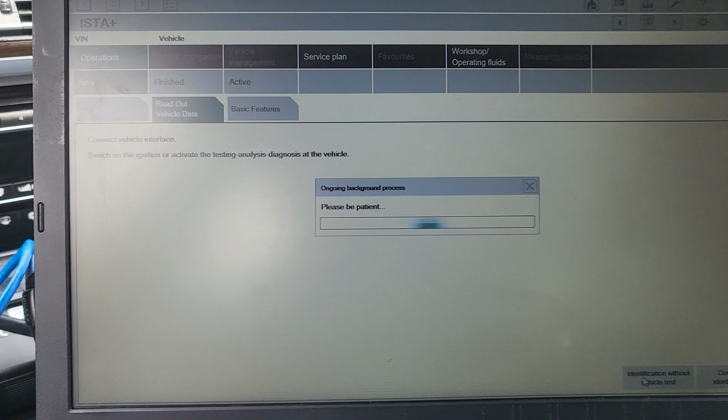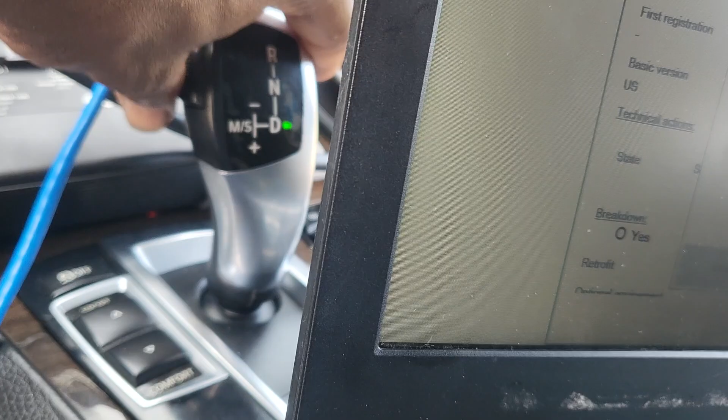So I'm gonna go to read out vehicle data. Hopefully I have communication. Start, diagnose the car. I want to know if I can get some information here. I have voltage. The voltage is 11 something. Why? The car in the back is not working well. So now I want to see if I can get the VIN number. Yes, that's good news. We have the VIN number, transmission D, and it never goes out of that place. Ignition is on.

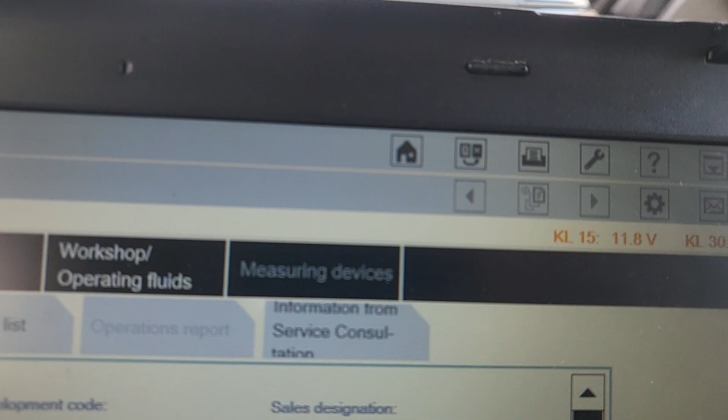Okay, it says battery voltage is low. You want to give some gas there? 11 is so low. Are you sure the bag is connected? Yeah. The voltage is very low. The voltage is 11.8. If the car is running, it's supposed to get 13 volts.

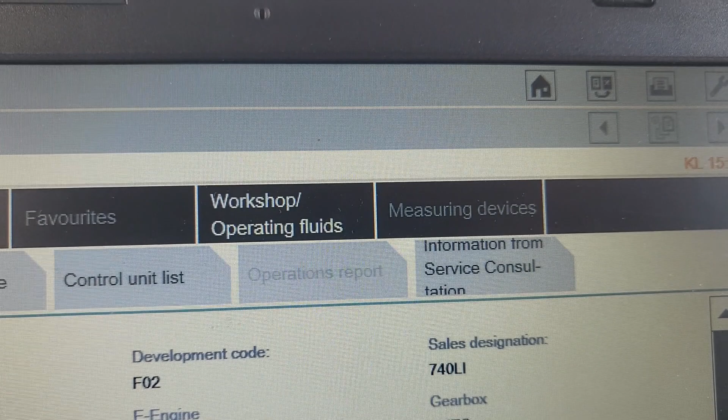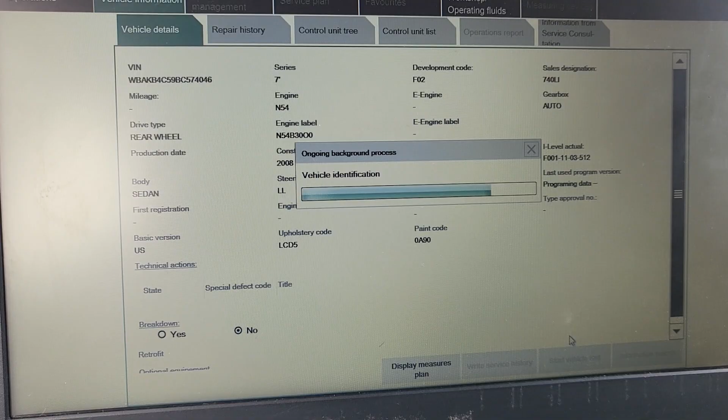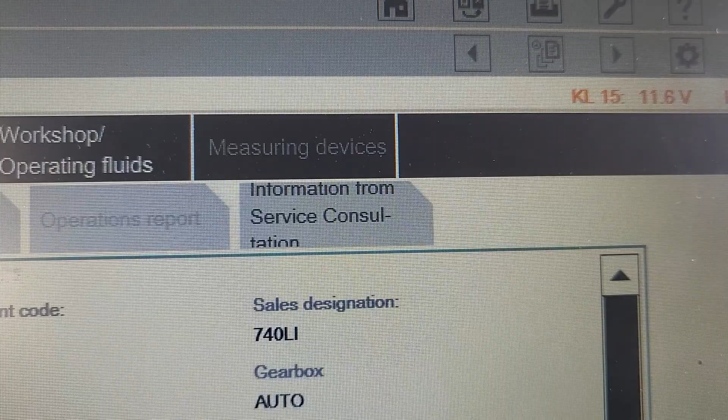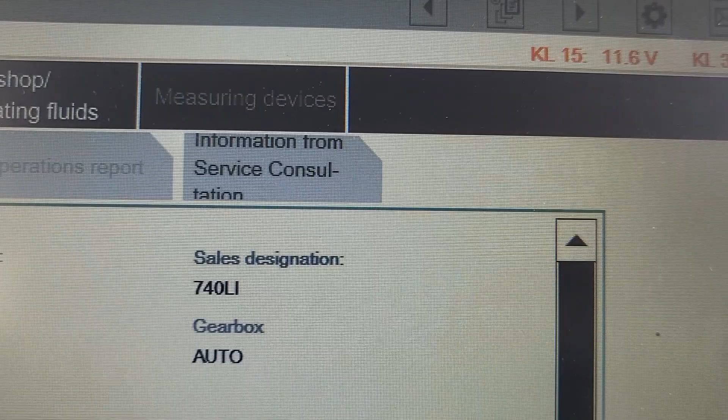Now it's 10. Now it's 11.50, 11.16, 11.6. Maybe it's gonna go. 11.6. I don't know why. But I think something's wrong with the cable, maybe. Leave it there. That's it. That's not bad. So I'm gonna communicate 7 series F02 740 Li. Engine N54.

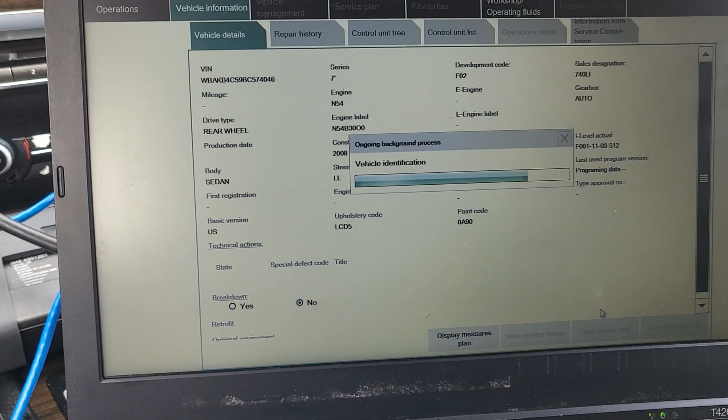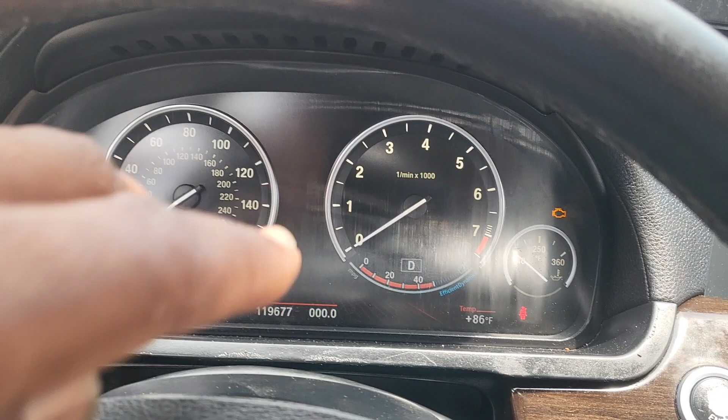The other car, when you are inside, just by being inside, the ignition is on. So I was trying to turn the ignition on to do the job. No, you're just gonna see the sign here, green. You are inside the car, it recognizes the key, that means accessory ignition is on. Just push the brake to start the car. So I was saying, oh, what happened to that car? Okay, now we have everything here. Let me see if I can start testing the car. Here is where it tells us what's going on, at least to have an idea.

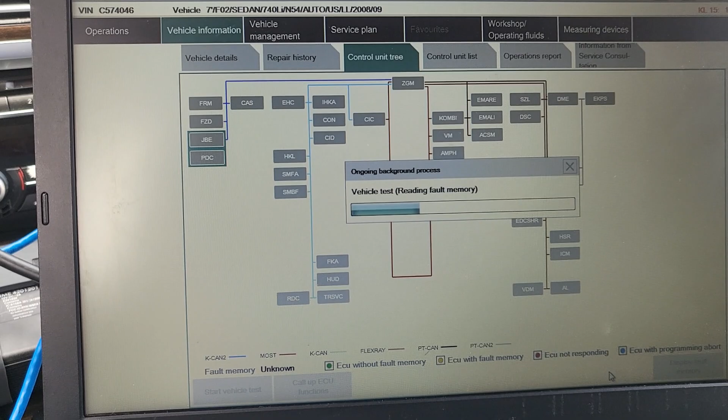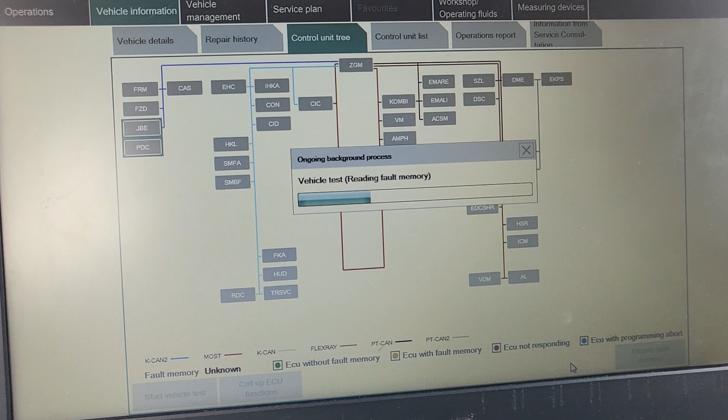And they say I have to leave the radio on, not to put it in sleep mode. Well, last time I left the hazard on. Yeah, I'm trying to see what it is. I'm supposed to get some information. You see now? Oh my goodness! You see now?

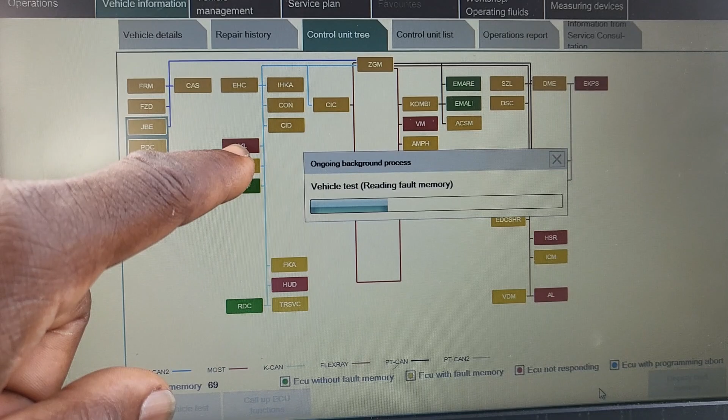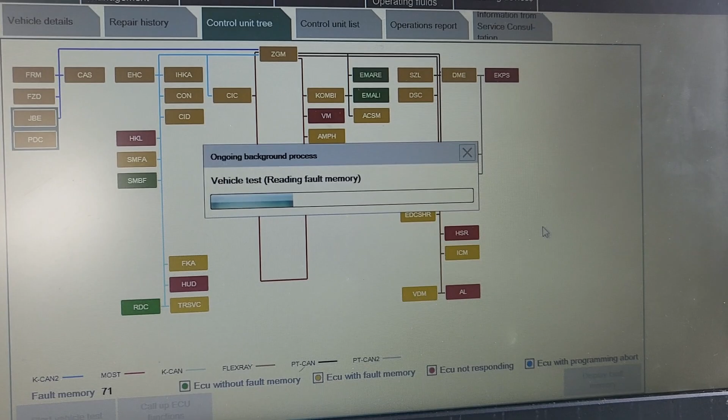The fuel pump control module is not communicating. HUD is not communicating. HKL is not communicating. That's why EKPS in the back. Engine computer is there. That's why you don't have gas. You see what is here? I don't care about those two. This is maybe for radio or sunroof or something. But the engine, let me see in a few minutes because it's covered here. That's why the car cranks, no start.

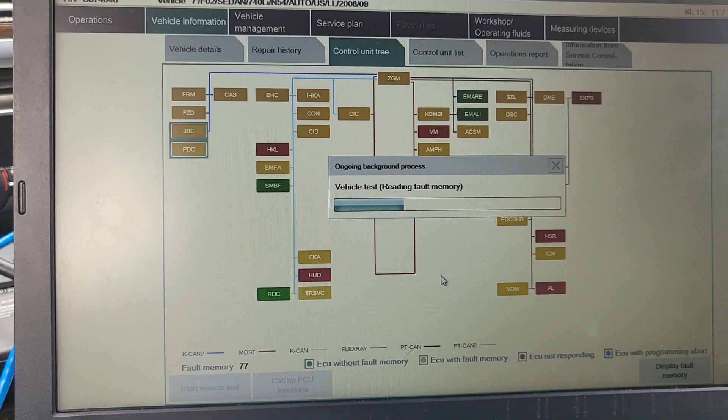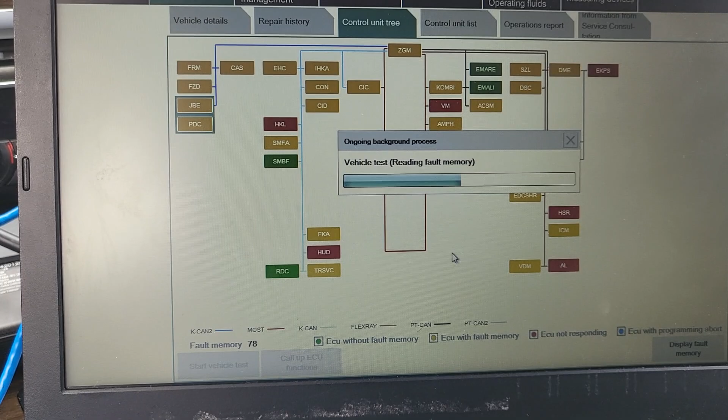And I'm surprised, he said the car started. It didn't, and the gas was spraying. But right now I can't see the fuel pump, unless it went into safe mode. Safe mode. So the fuel pump, maybe water got into it. Fuel pump is in the back. The fuel pump control module is under the chair, I think. Either under the seat or on the bottom, in the back of the car. We gotta look at it now. Sometimes water gets into it. But right now I cannot see the fuel pump.

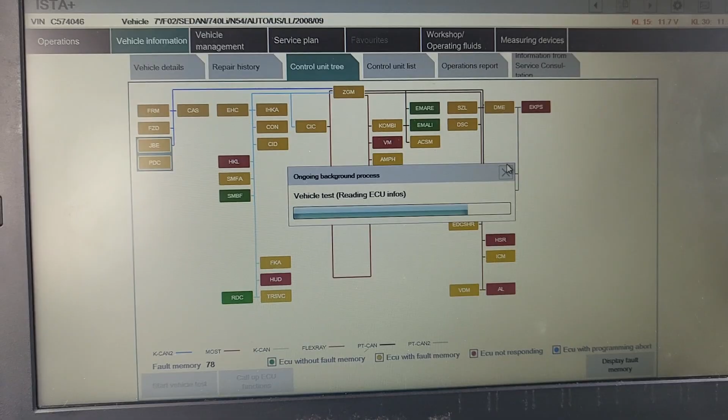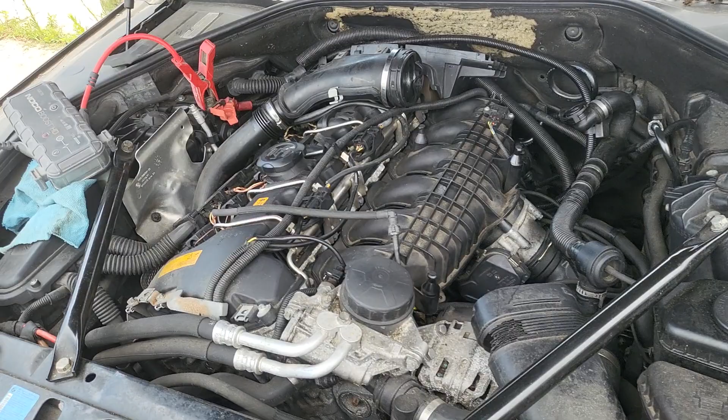And a couple of modules are not there. But the ABS is there, DME is there. Let the car run meanwhile. I'm gonna check something. Okay, on that car you changed even the starter, right? Yeah, it's a new starter. This is the one that was loose. Yeah, so that's when gas started spraying.

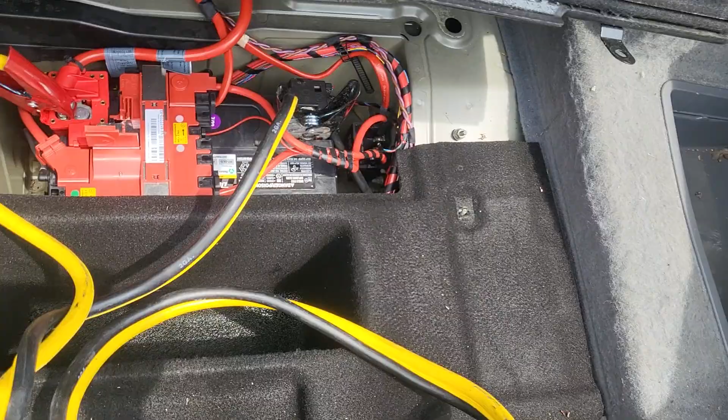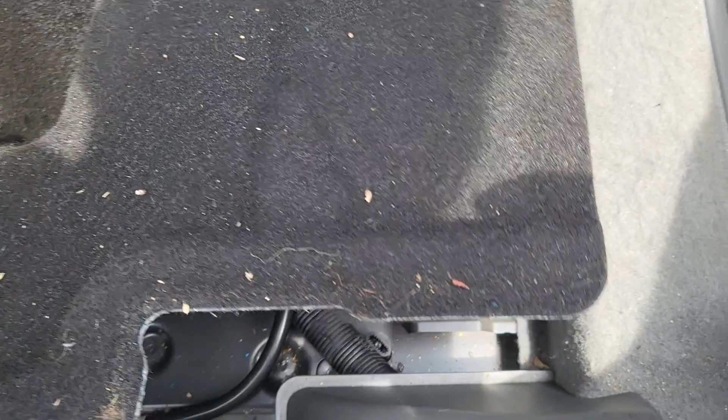Here, let's see where the fuel pump control module is. You can take this thing here, maybe water got in. You see here? You see the reason, my friend? One of the reasons could be here. Take this one out. Isn't this the fuel pump control module? It's not there. Somebody took it? You think somebody just took it today? I don't know. This is the fuel pump control module. It's not there. Like somebody broke it.

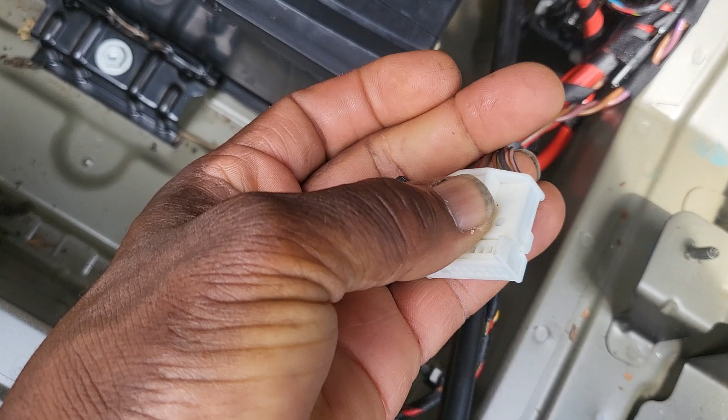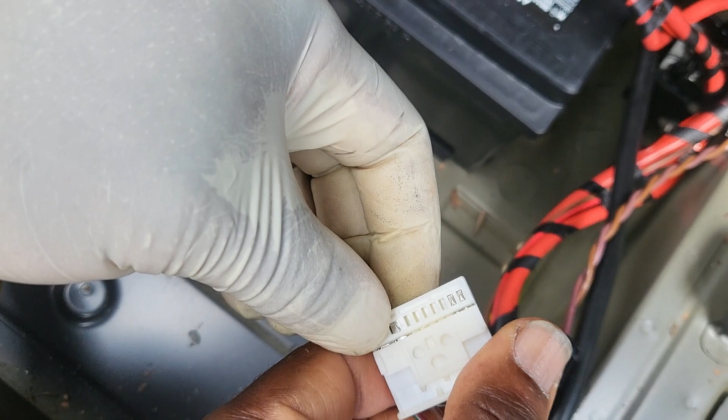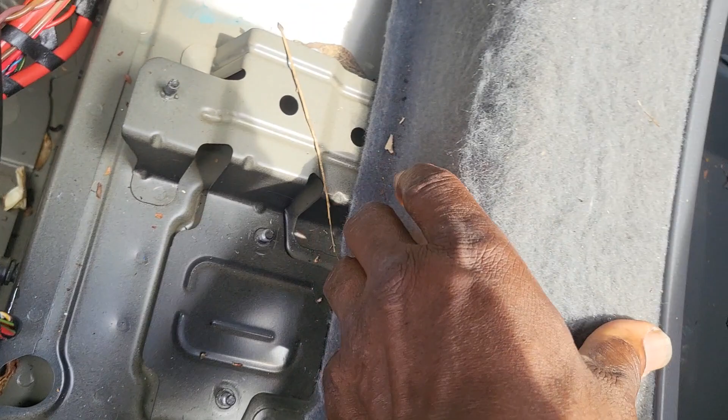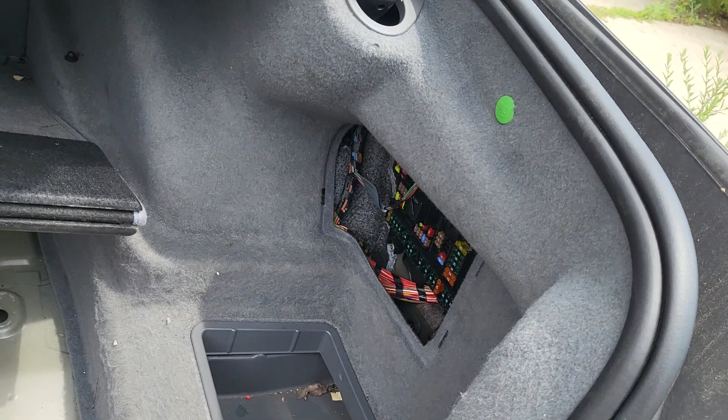Pull this one. Take this one out. Are you sure? Yeah, this is how it looks. Okay. So there is something here. Something is missing here, I believe so. And you have water there too, but I don't see it. That's one. Also, let's see why the transmission is not communicating, or what happened to the transmission. But that will not cause the car not to crank.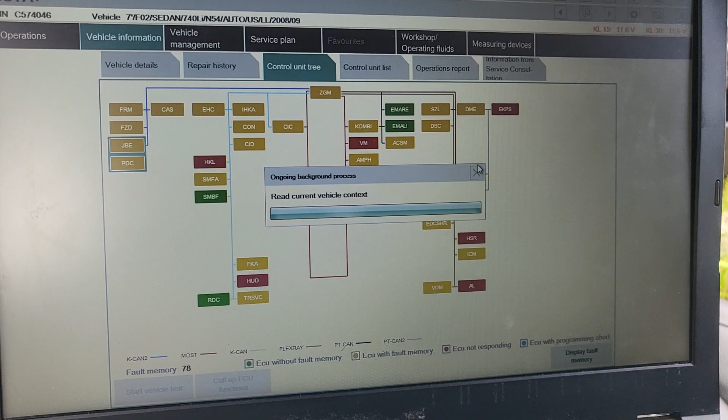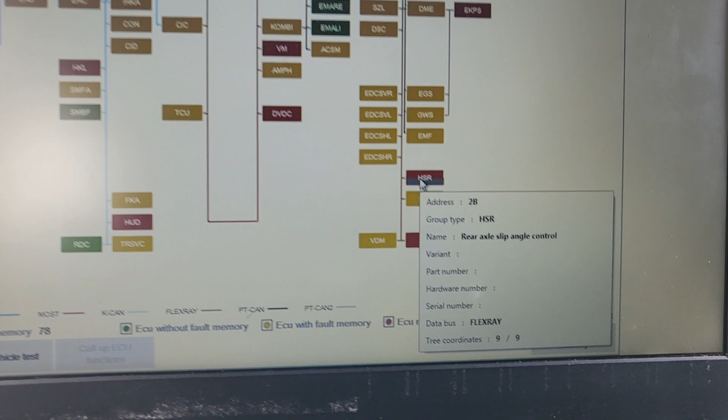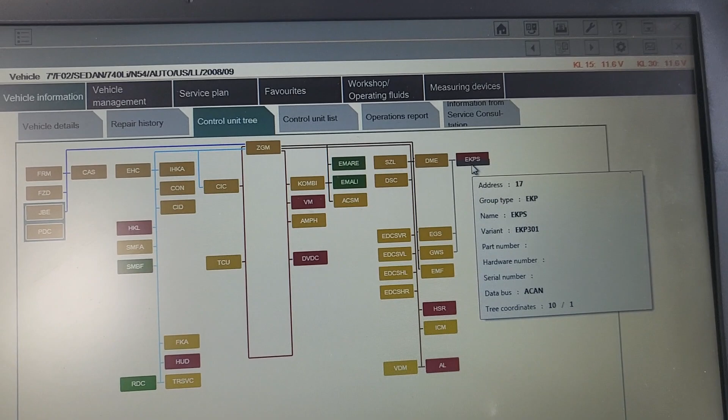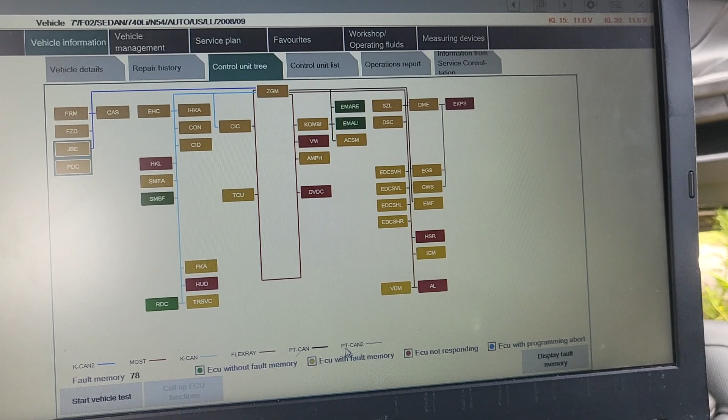Okay. So now we have that one. Here is rear axle slip angle. DVD, video module, but this one is not there. What is the transmission? EGS. So let's see, we have 78 computers. Do they have 78 codes? I'm gonna display memory. No communication. What happened to the transmission? No communication with the EGS.

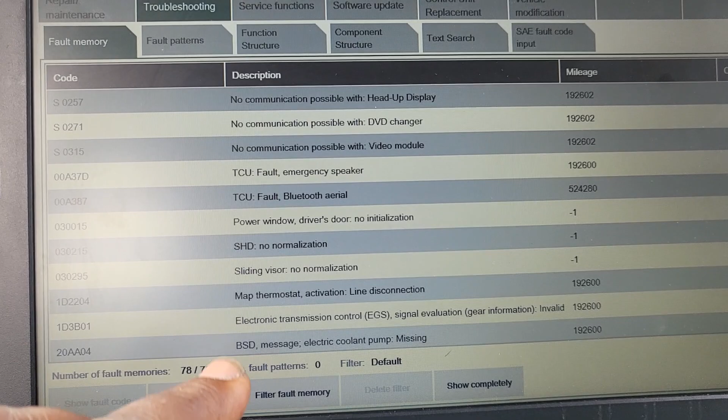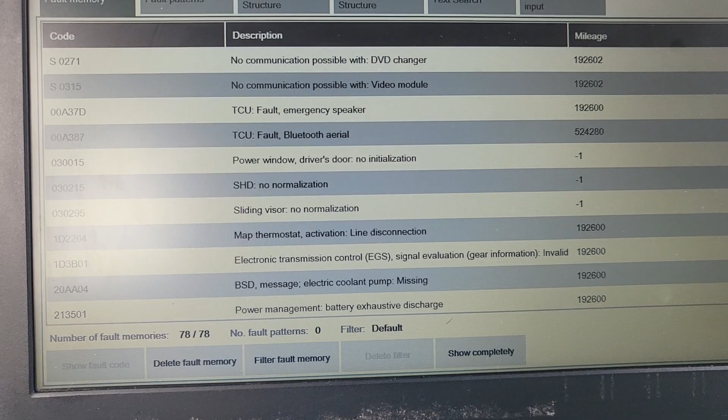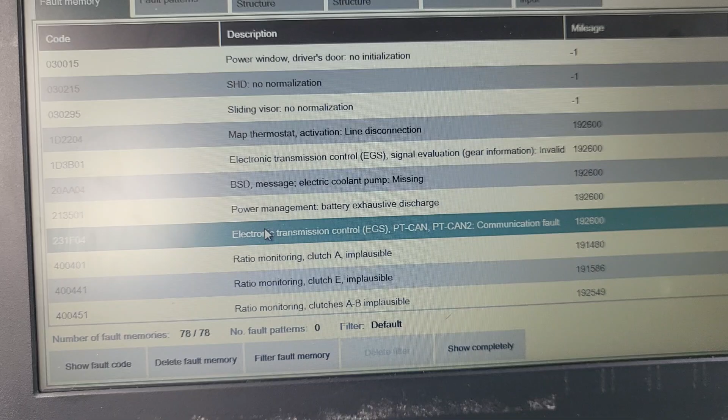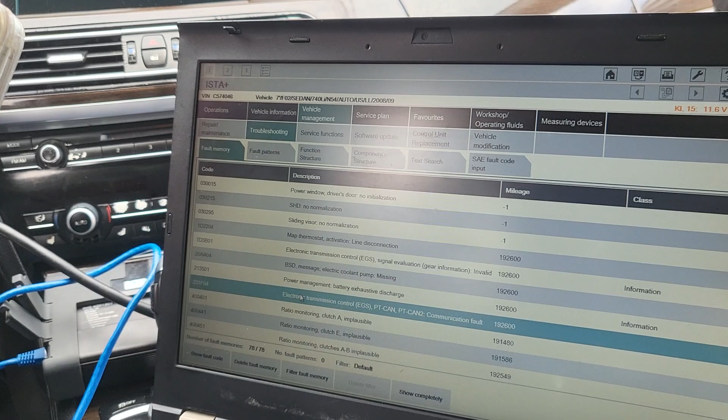Window not normalized. Electronic transmission signal evaluation gear information invalid. Electronic transmission controller EGS signal evaluation gear information invalid. Ratio clutch E implausible. You have a transmission issue. Take this code. But that one will not stop the car from cranking. Take it all the way. You're gonna have everything together. Push it.

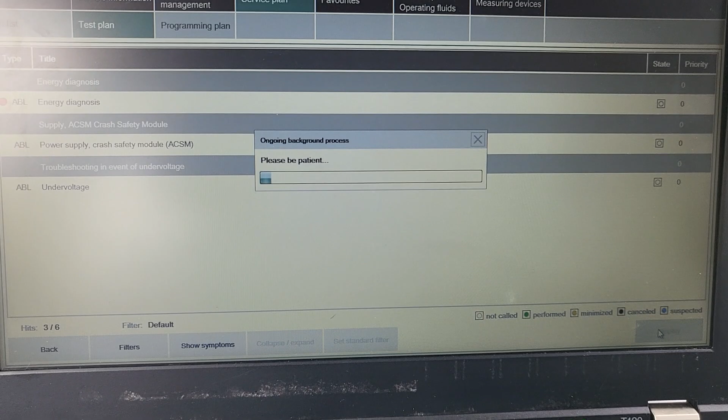So let me go to test, calculate test plan. You have an internal issue in the transmission. Yeah, internal problem in the transmission. But you are able to crank the car, but there is no fuel coming, and I was surprised, where did that fuel come from? He says there is spraying fuel there. I'm clearing all the codes again.

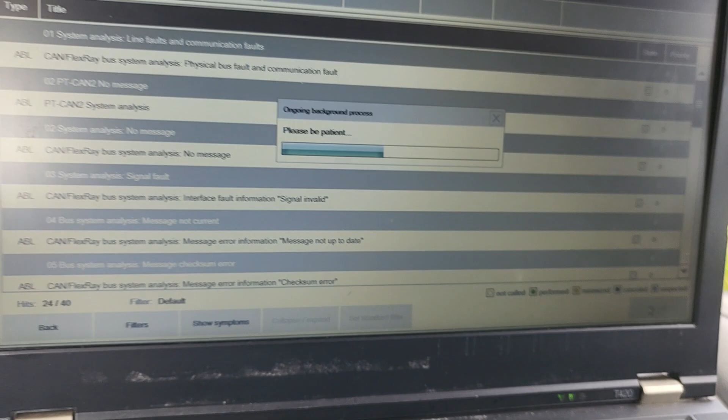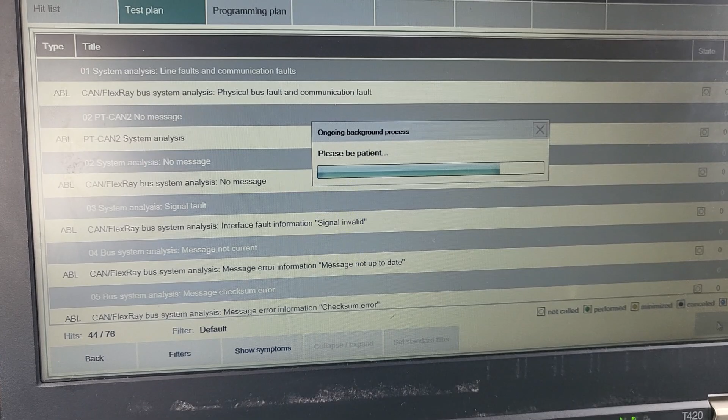First, you need to get that sensor, the module. After you get the module, if everything is okay, the car is supposed to start, but the transmission is still, you're gonna have this fault. I am cleaning all the codes and reading again. Yeah, but it was a lot of transmission codes, so that's why I'm like. Yeah. And you get the codes with the car being off. That's the thing too. Yeah.

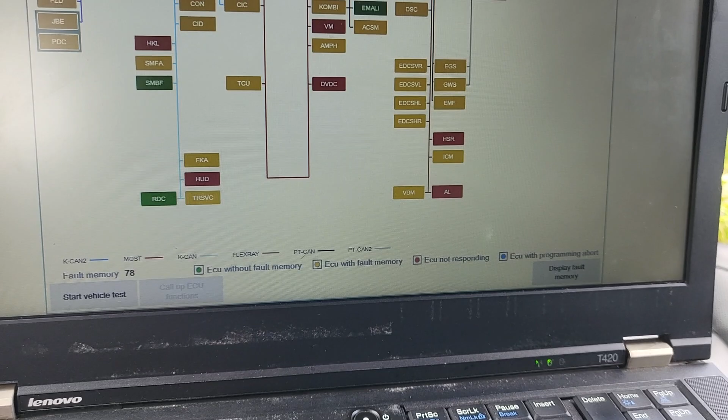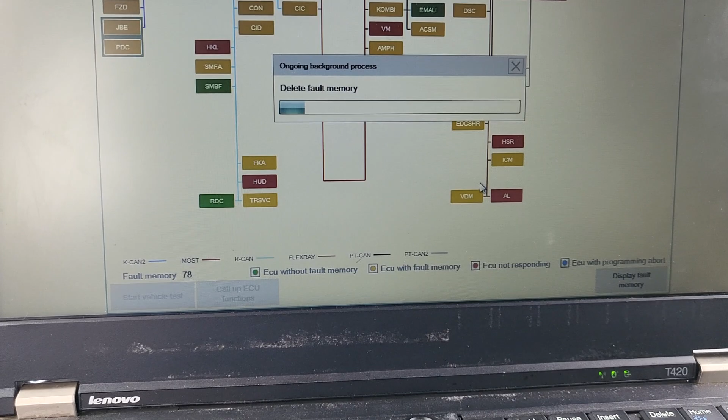So now let me see what I have. Okay. Let me display the fault. Delete fault memory. Yes, I'm gonna delete. Ratio. You have transmission ratio. That means the transmission itself is faulty. And any code in the transmission will flag it and put the car in limp mode. That's why it could blink. Now let me delete it and see if it's gonna work again.

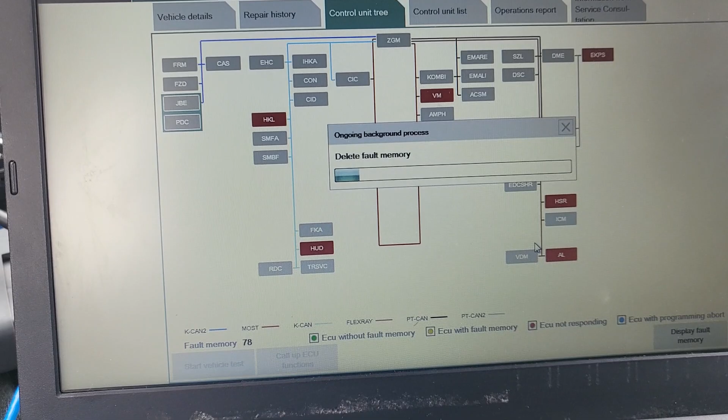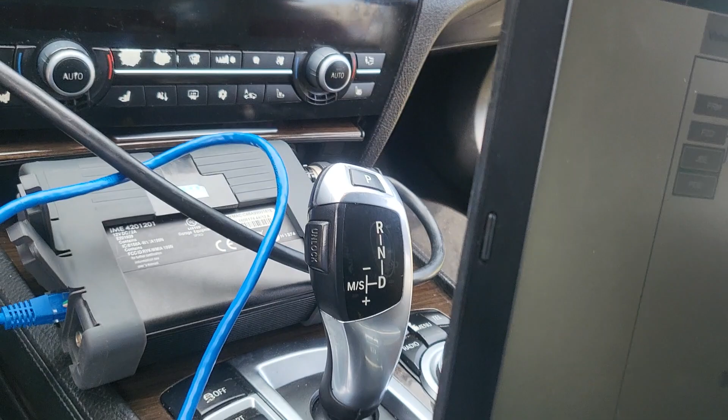And you have 1, 2, 3, 4, 5, 6 computers not communicating. In the transmission? No, 6 computers are not communicating. They have problems. Which computer? The main one is this one, but all the others are not a problem for me. Car reset. You see the transmission malfunction? Yeah. And it's saying it with the car off. Yeah. My thing is it should allow you to clear it. I'm clearing now. I'm sending everything now, but it's still blinking. You see?

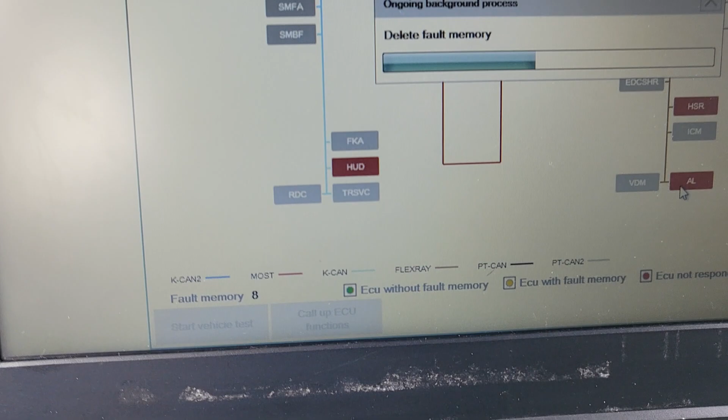Drew, you got any fuel pump modules for the BMW 740, 750? Pump module. Fuel pump module.

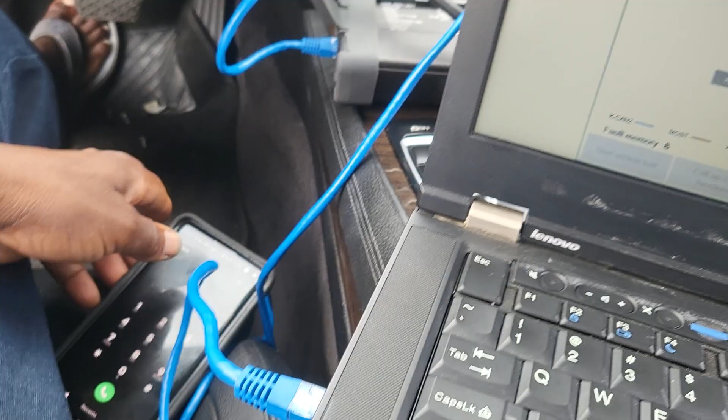I'm gonna wait till it's finished itself. So I think this car has a fuel pressure regulator or a mechanical fuel pump, a high pressure pump there. That's why the car starts for the first time, but it doesn't want to start again after; there is a leak on the injector side. It doesn't want to start again because the module is not there. And also he's getting this blinking.

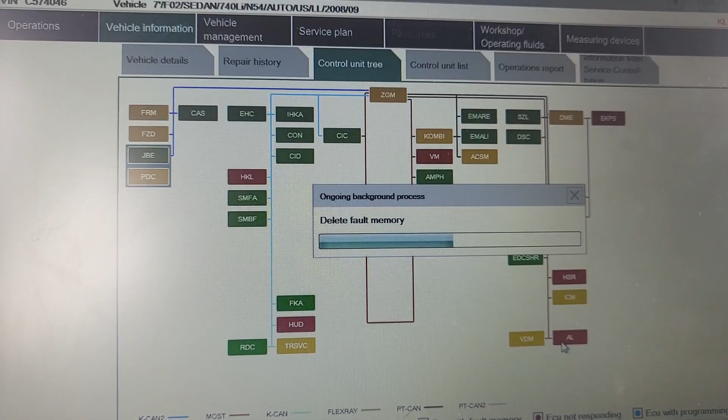I just finished from 77 or 80-something codes. I'm just getting now 44 codes. So let me finish this diagnosis. The transmission has like 3-4 lines only on this car. You may have to get the same valve body, unplug it completely, connect it from the bottom to see if those codes go away. But I believe internally there is a problem in the transmission. I think maybe they towed it with the car in park. Messed up everything, right?

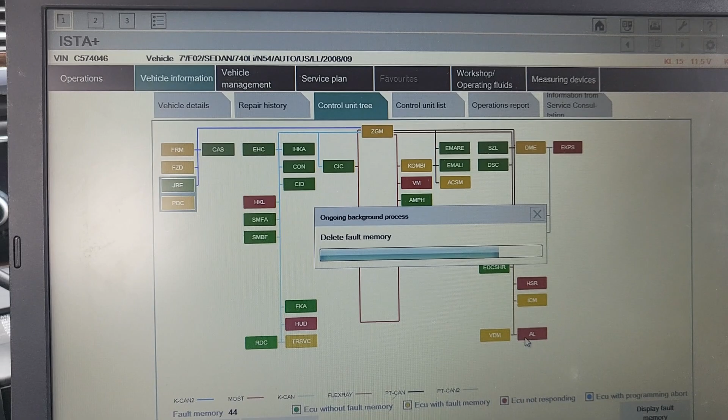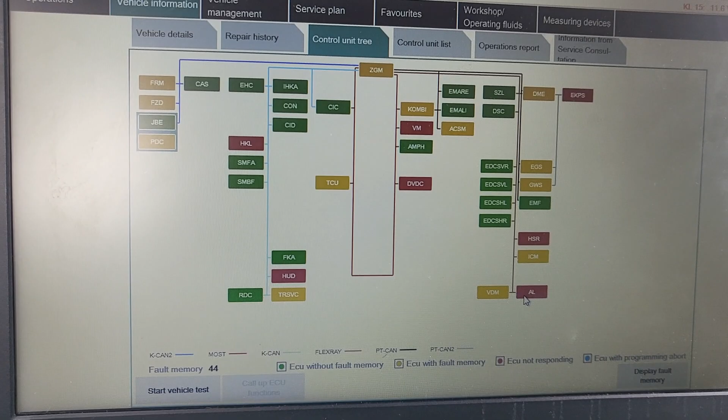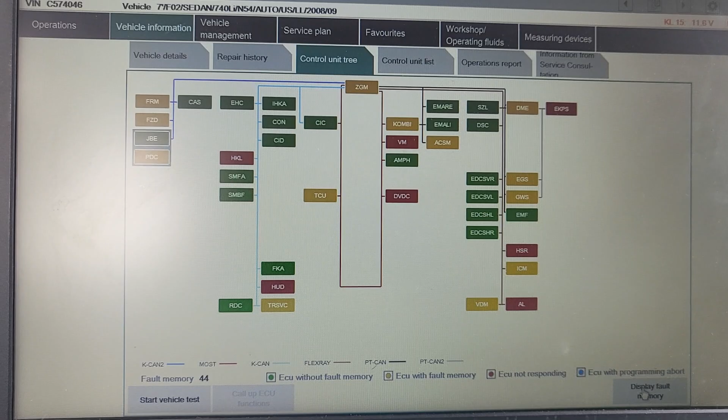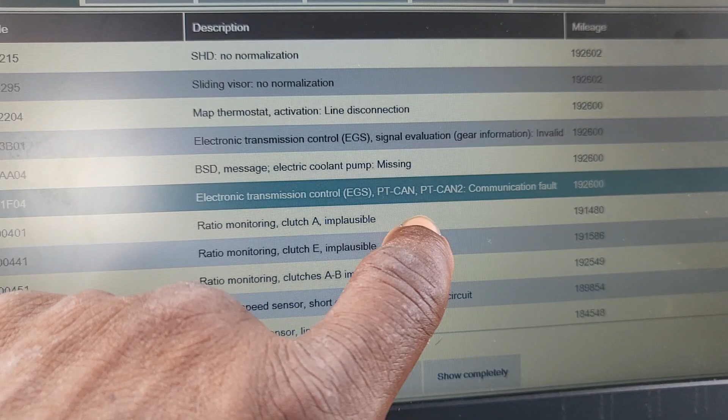Okay, you see now I have 44 codes. This one here, crash safety, I don't have to worry about that. DME, okay, and I have transmission code, address 18. So let me display the fault memory again. Electronic transmission control module, PT-CAN2 communication, ratio monitoring clutch A implausible, ratio monitor clutch E implausible, ratio monitor clutch AB, turbine speed sensor, short circuit to ground. But we're still communicating with the car.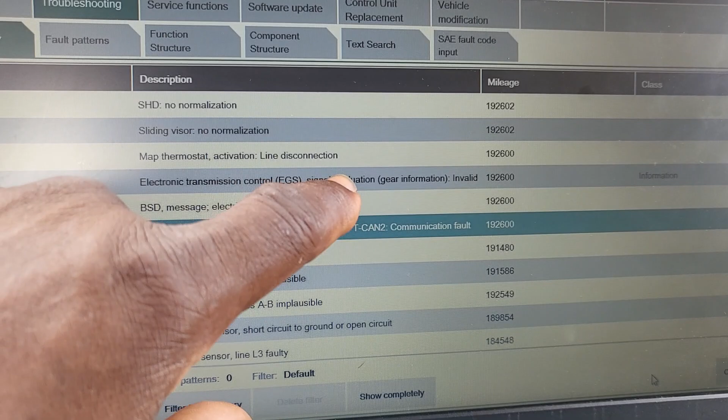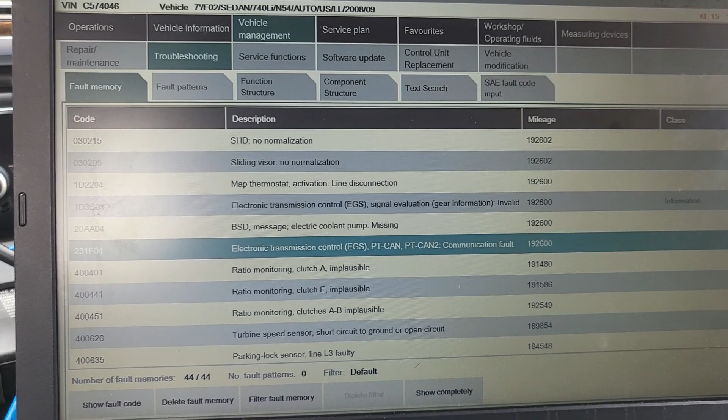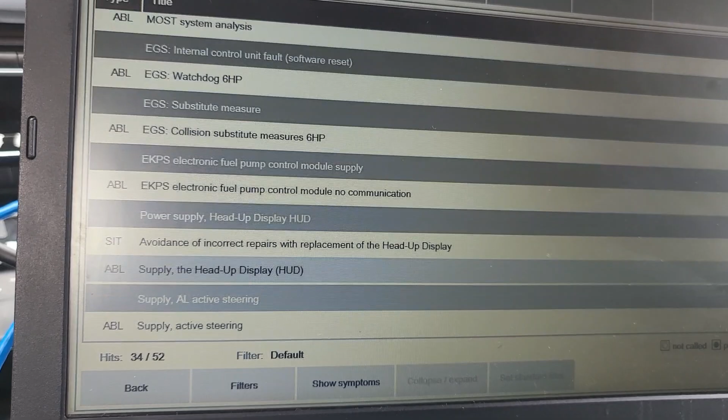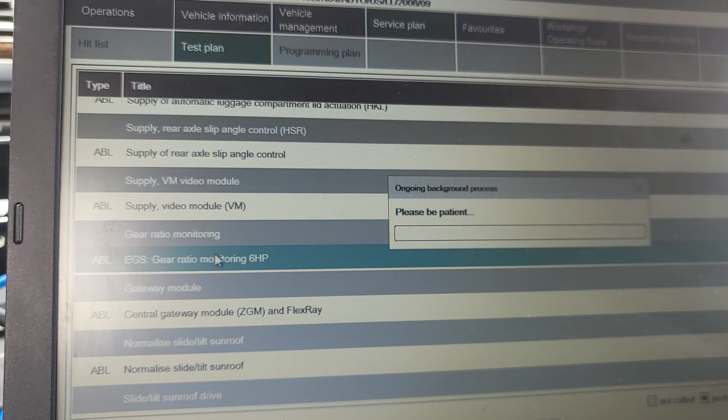Electronic EGS signal evaluation. You know, like if you try to calculate the test plan. But before you do anything, gear monitor, gear ratio. You see, it's gonna give you some information about the transmission. Gear ratio, the following faults, those are the faults that you have. And the turbine speed greater than this ratio clutch, they all bring it together.

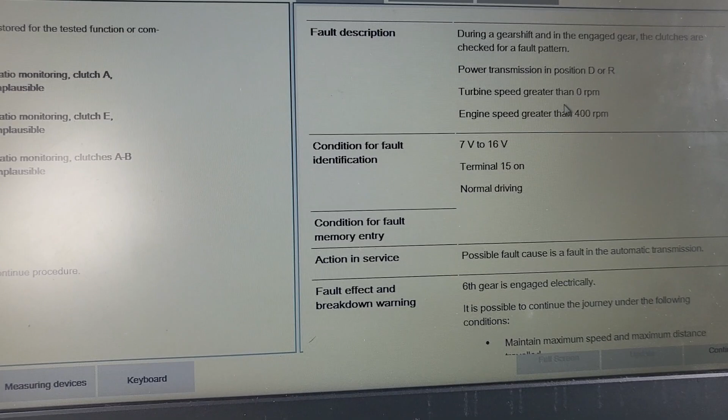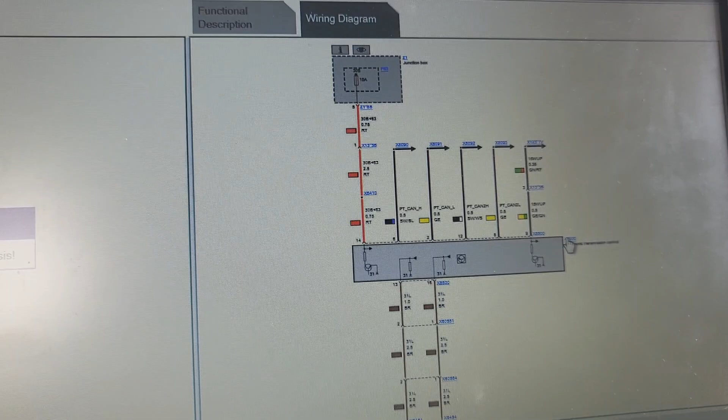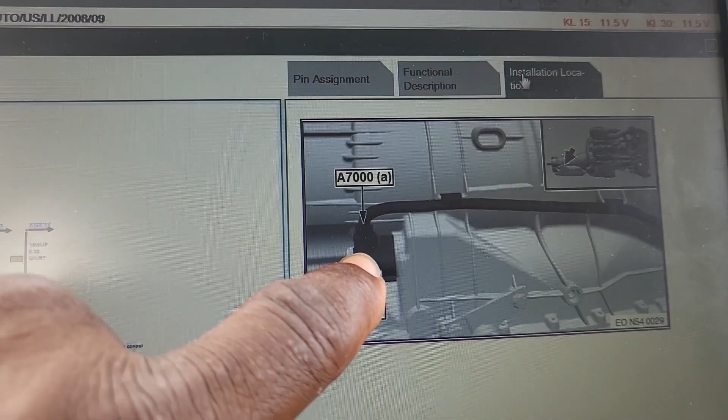Let's do this. And it has only one power supply. If there is a problem with the power supply, we can say this is a power supply problem, but we are able to read information from the transmission. Yeah, because the gear ratio code, I'm like, how is it scanned? You see it? And the car is off. Yeah, and there is only one power. So what you need to do is disconnect this one, get another valve body, plug it in. If it's working, no code, everything is gone. You understand? Otherwise there is a problem on the sensor.

But before we go crazy, let us get the fuel pump control module.

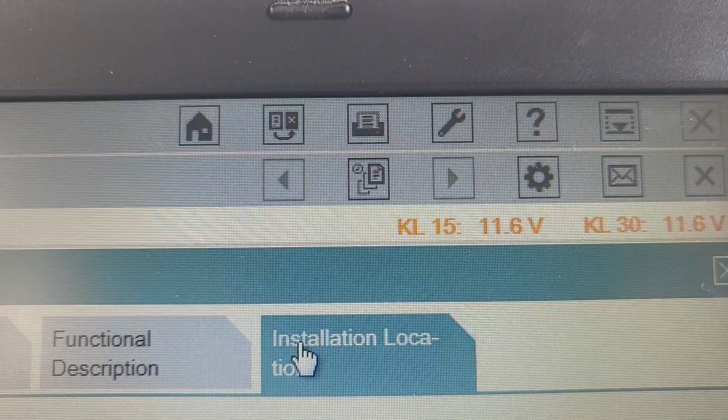And the car must crank. So let me see now. You got the fuel pump module on the block, right? Oh, you got to put the key by the. For cranking too. Can you crank it for me? Press, release. Yeah. Okay. Your battery also is no good. This battery here still has 11 volts. That's very weak. But that would still turn it over, you don't think? It's still turning over. Yes, it should turn over too, but. Go again.

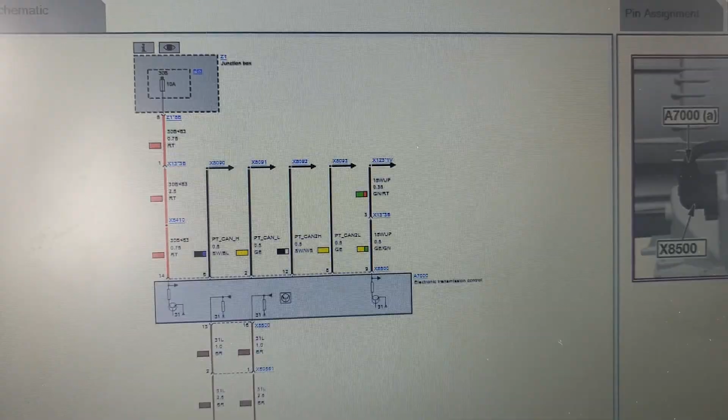Okay, what you need to do is, when you get a good battery or the booster, try to crank it from the starter direct, so that at least you can crank it. And the booster's on the front. Yeah, put the controller, and after you put the controller, try to crank it from the starter to have it cranking. If the ignition is on, it should start. As soon as it starts, then you can go to the next step.